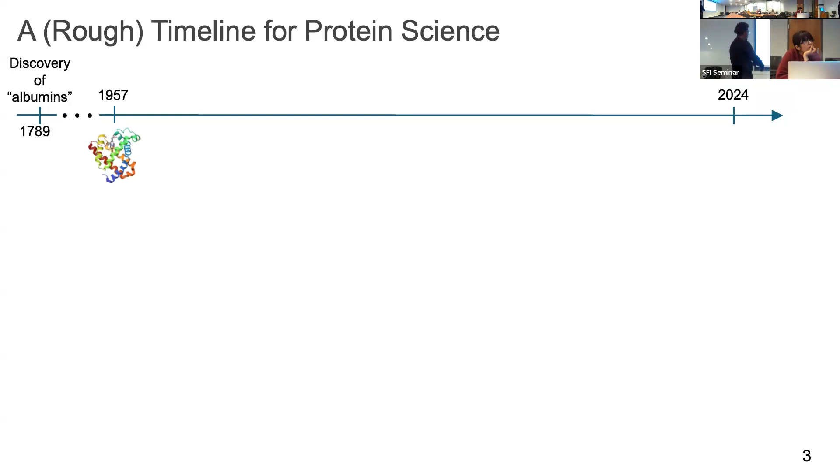Fast forward another 20 years, we get the establishment of the protein data bank, which houses not only protein structures, but also protein interactions and nucleic acid structures. And you can see here that the number of structures looks like it's growing sort of exponentially every year.

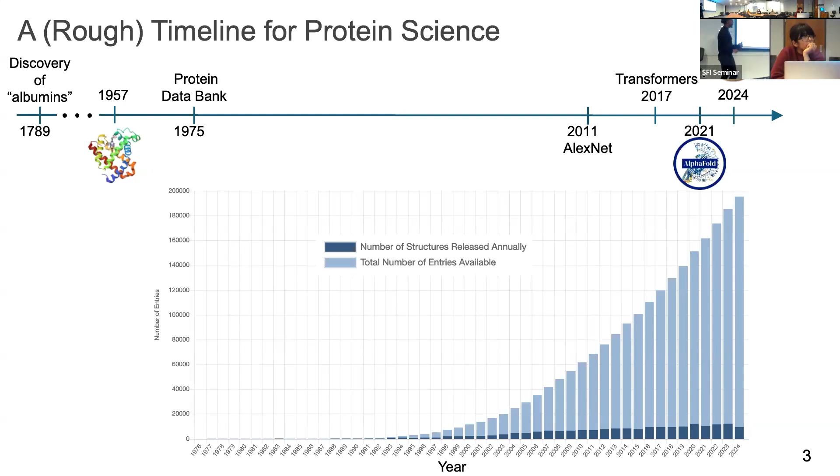And then in 2011, we get the establishment of the modern deep learning era with the publication of the AlexNet paper. 2017, we get the attention mechanism and the transformers architecture. And then in 2021, DeepMind publishes the AlphaFold paper. And then in 2024, the rest is history, they won the Nobel Prize. So what I want you to take away from this is that AlphaFold was trained on nearly 50 years of clean, well-curated crystal structure data.

And so me being a former biologist, the question that I ask is, what's next? So the way I think about what's next is to think about biology in sort of two different paradigms. So here I'm going to use an engine and engine parts. Sorry.

So AlphaFold is the foundation model, if you will, trained by DeepMind that predicts protein structures. So basically what they did was they took this protein databank, they trained on about 200,000 protein structures, and then they were able to predict structures for virtually every known protein.

Not necessarily. I think if you were a super duper AI nerd, you would know. So I'm not assuming that you are, but maybe some of us in this room.

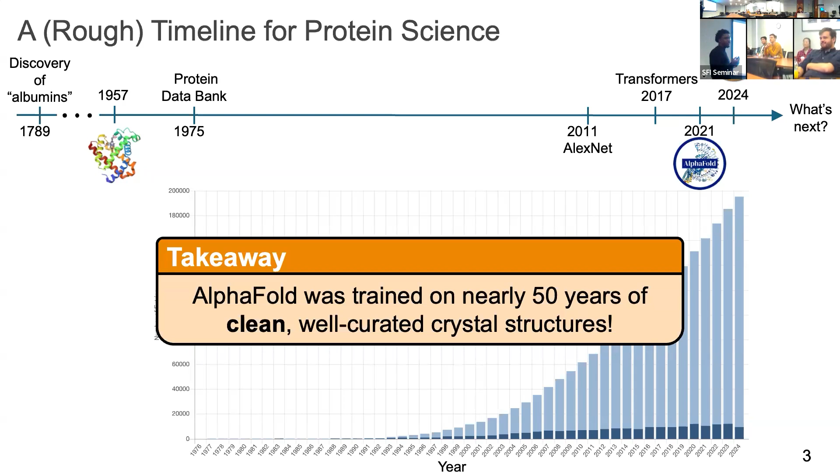Okay, so there's two ways that I think about biology, and I'll use this car engine analogy where the engine is the cell, and the proteins are the parts. And so historically what's been done is that we've looked at these parts in great detail using the tools from biochemistry and structural biology. And we try to infer how these engines or cells work.

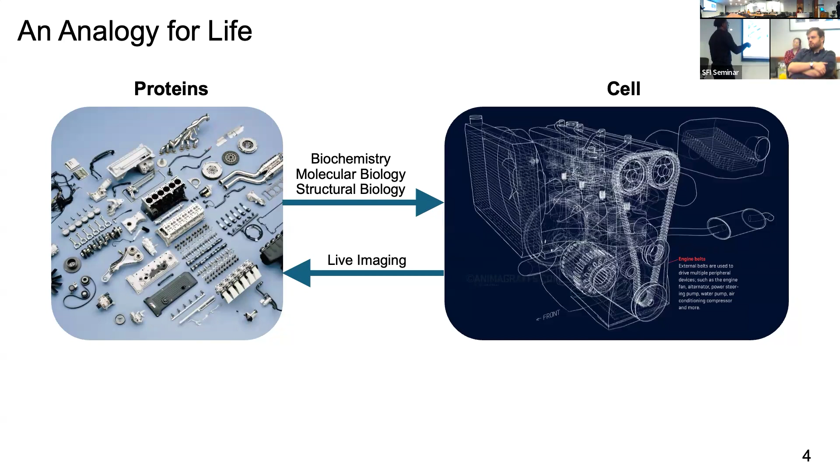This is really difficult. And I think that there's another paradigm which might be more informative, and that's studying the engine directly and trying to understand how these parts or proteins work together to do things inside of live cells. And so this is what I have a lot of experience doing. So in my former PhD, I was studying how cells generate forces in developing embryos. So here's an example here.

You can see these accumulations that are forming, and that's the surface of the cell contracting. So this is a really important process. It happens all over the place. It happens when the cell crawls, or when the cell divides, or when the tissue bends during development. And what I'm showing are a bunch of proteins. These are the kinds of things that AlphaFold can predict the structures of that are involved in this process.

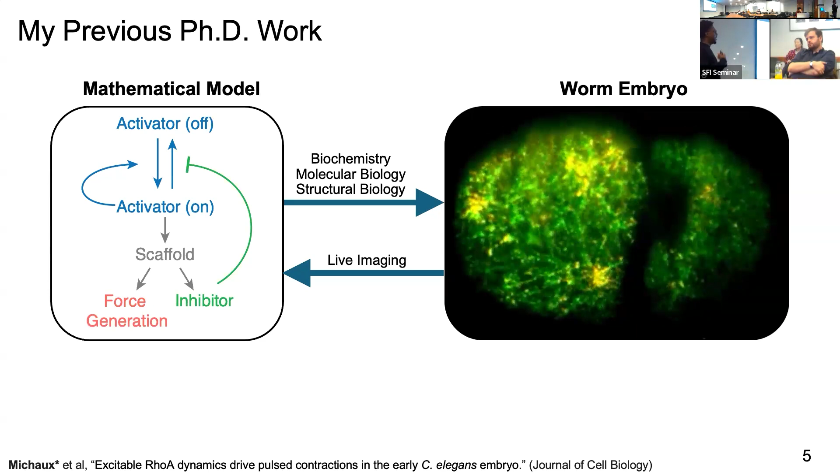So what I did was I made quantitative measurements of these things inside of these cells, and I was able to back out a mathematical model of how this works. And so what I learned in the process was really that the whole is greater than the sum of its parts. And then, with the recent Nobel Prize being awarded to AlphaFold, I started to wonder, why hasn't cell biology had its AlphaFold moment?

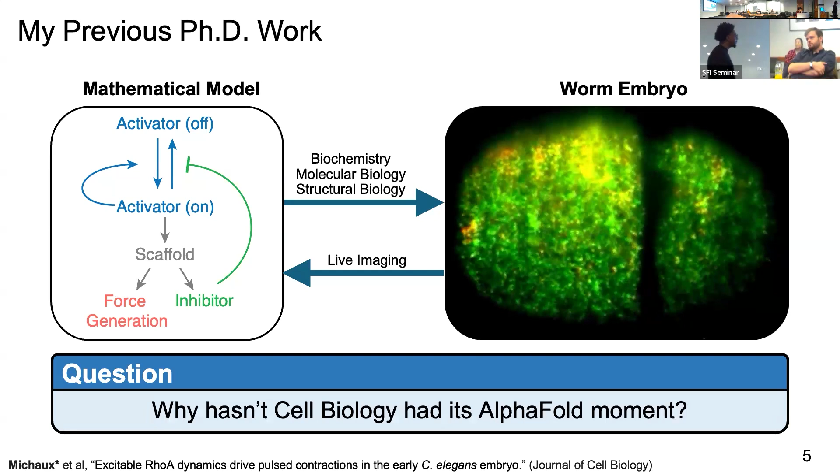And I think the answer is because doing biology is actually very difficult. So it can be difficult to design experiments to study really complex systems, like this embryo that's zippering its neural tube. It's difficult to handle solutions. So putting protein or RNA in solution is very difficult because they tend to denature. It's not obvious how to scale up a lot of experiments.

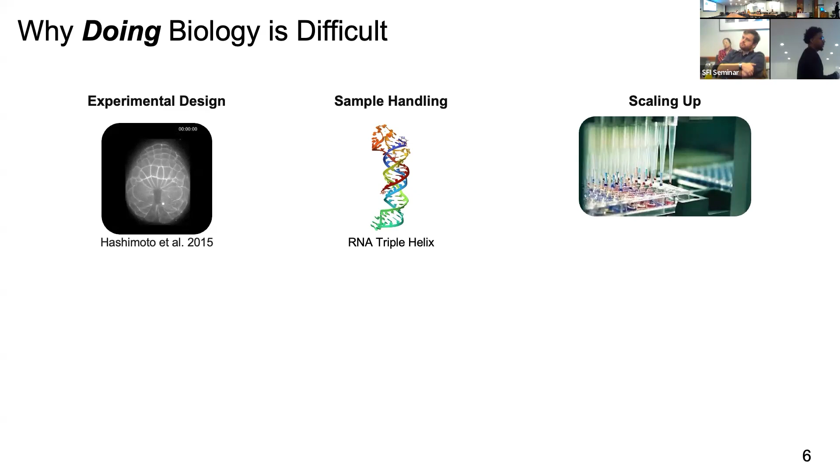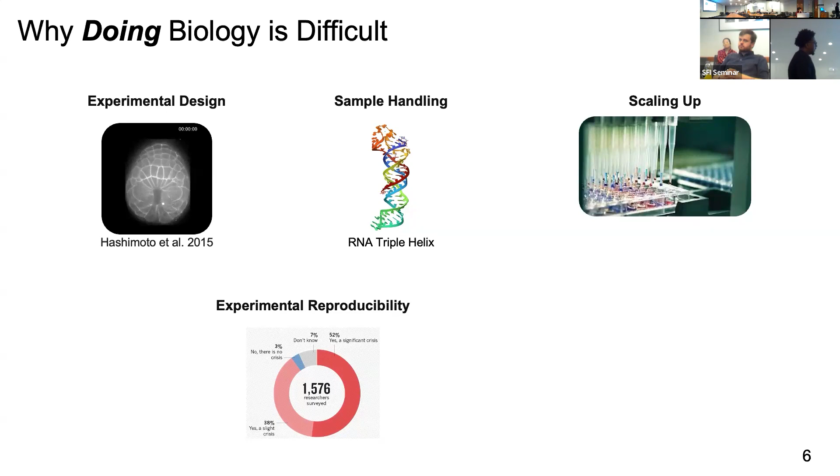So the person who collected this is an exceptional experimentalist, and I'm pretty sure he's the only person in the world who can do this. So how do you scale the collection of this kind of data when there's only one world expert? On top of that, it can be difficult to reproduce experiments, both within a research lab and across research groups. And if that isn't bad enough, your experiments might kill you.

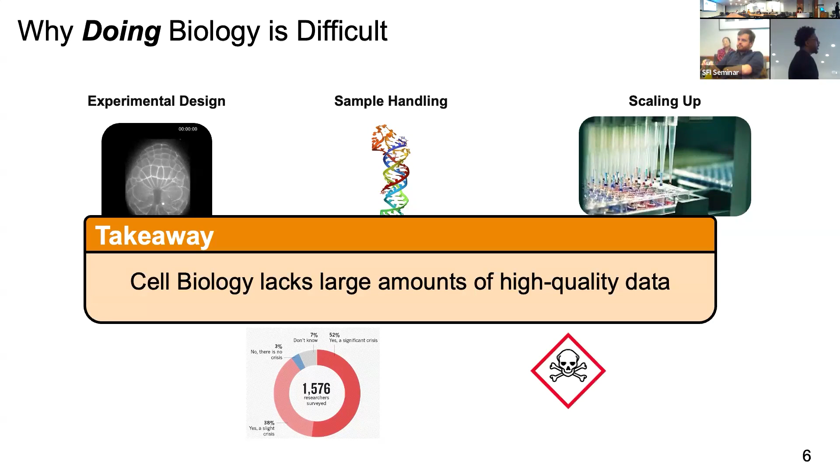And so the takeaway is that cell biology, and other fields in biology, lack large amounts of high quality data to train these large AI models. And so I think the solution to that is to build robot scientists. So this isn't exactly a new idea, because the pharmaceutical industry has put robots in research labs for a very long time, but they tended to be more of the automation style robots, which I'm showing on the left.

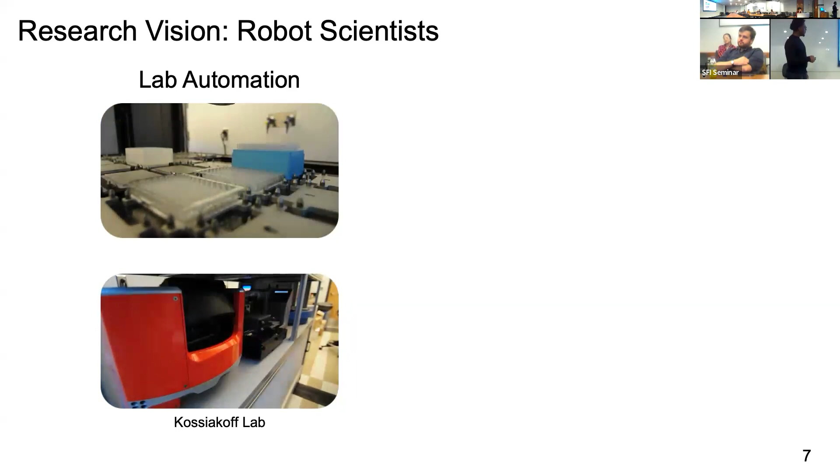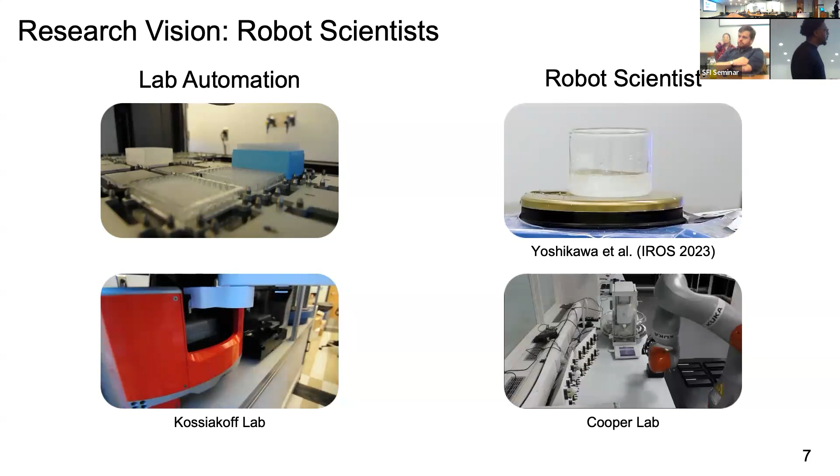So at the top, there's a liquid handling robot that's just moving liquids around, and then a more or less pick and place robot that just integrates equipment by placing plates and things in different machines. But I think that these kinds of robots need to be enhanced with more general autonomous robot scientists. And so what these robots are doing are things that are more similar to what a dexterous, expert human scientist would do in a research lab.

Sure. Source of energy. I mean, movement doesn't happen out of the sky. It has to have an energy. So you're asking for an example like this. Yeah. So I can answer the question, where does energy come from? Absolutely.

So the way this works is that you have molecules like this, which is myosin. So you might be familiar with the myosin that's in your muscles. It turns out that that molecule is also inside nearly every other cell. And it uses the hydrolysis of ATP, which is an energy source, to squeeze things and shift them around. So this is a cell. So it has its own metabolic processes that are producing energy.

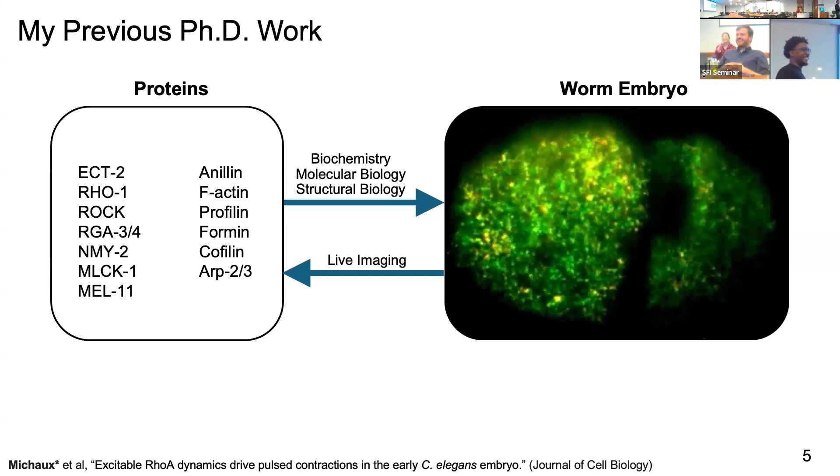It is fascinating. And that's why I spent X amount of years studying it. We don't have to talk about how long it was. Okay. So

The question I've been asking myself lately is, what are the requirements for a robot scientist? And I think some of the requirements are pretty obvious. First, the robot needs to perceive its environment. Research labs tend to be semi-structured. They're dynamic with people and instruments moving around, and they're also full of transparent objects that can be difficult to detect. Robots also need to be able to learn behaviors, especially as an experimental workflow begins to change, right? We don't just continue to do the same experiments over and over.

And this can be difficult because if you're teaching a robot directly on real hardware, it can be expensive to collect real world data. And if you do all of this in sim, crossing the sim-to-real gap is still non-trivial. And then lastly, the robot has to actually go out and do real work in the real world. So that means that everything the robot does should be in real time. The robot should be able to reason over contact as it's grasping and manipulating different objects. And then lastly, and maybe more importantly, the robot should be safe.

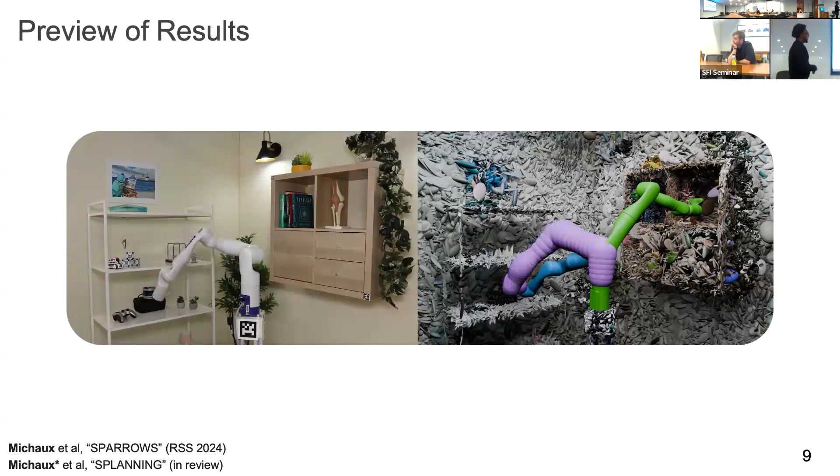And so the question I've been asking myself for the past year is, what are the correct representations for addressing these challenges for enabling robot autonomy? And so here's a preview of some of the results that I'm going to talk to you about today. Like I mentioned at the beginning, I'll talk to you about two different projects. The first project is how we build a safety set around the robot. And then in the second project, I'll describe how we integrate that safety set with radiance fields so that we can plan directly from visual input.

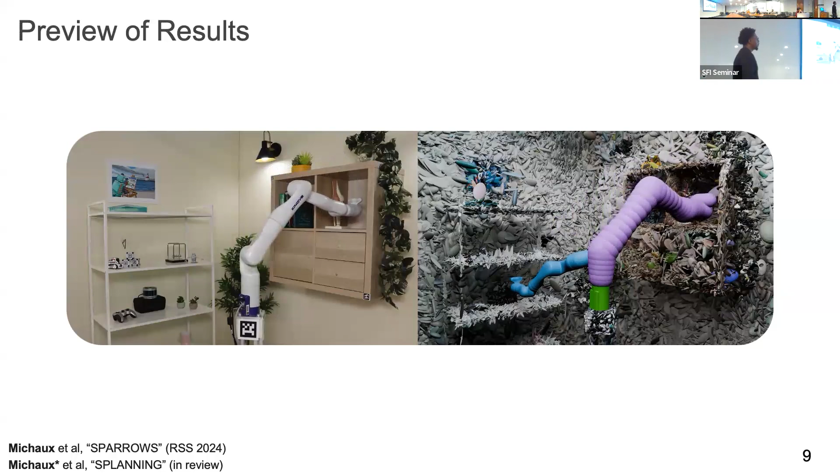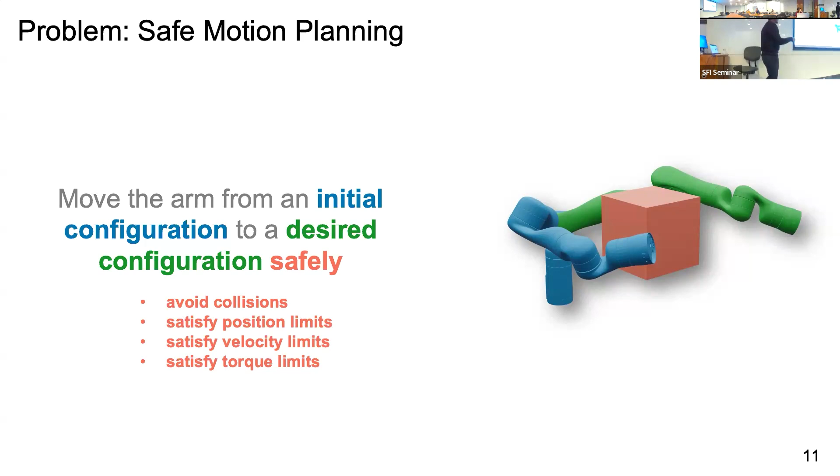So I just sort of mentioned this, so I'll just go past. All right, so here's the safe motion planning problem that I'm trying to solve. So I would like to move the arm from some initial configuration shown in blue to the desired configuration shown in green, and I'd like to be able to move the arm safely. And here, my definition of safety means that the robot should satisfy its actuation limits. So this means that the robot should satisfy its position, velocity, and torque limits.

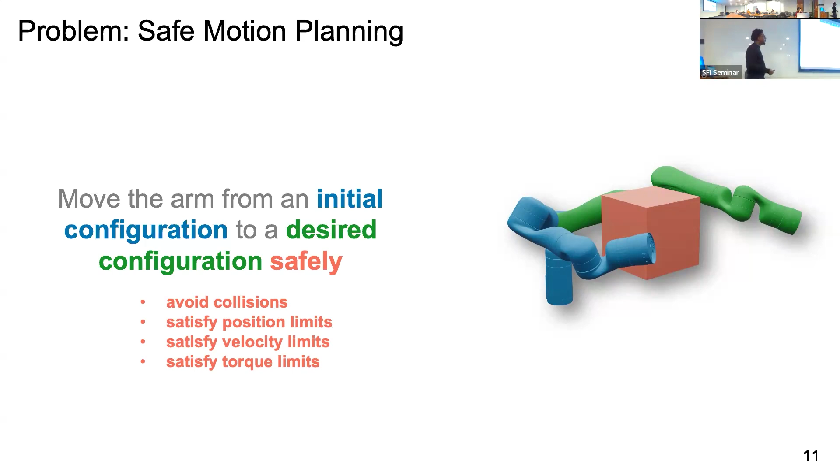So what this ensures is that any trajectory that the robot will follow is actually realizable in the physical system. And then lastly, the robot should avoid collisions with obstacles in the environment.

And the way that I typically approach this is by applying a hierarchical planning framework, where at the highest level, there's a high-level path planner that generates discrete waypoints between the start and the goal. At the middle layer, there's a trajectory planner that specifies the positions, the velocities, and the accelerations as the robot's moving between waypoints. And then at the lowest level, there's a tracking controller that ensures that the robot can actually track the trajectories that are generated by the trajectory planner.

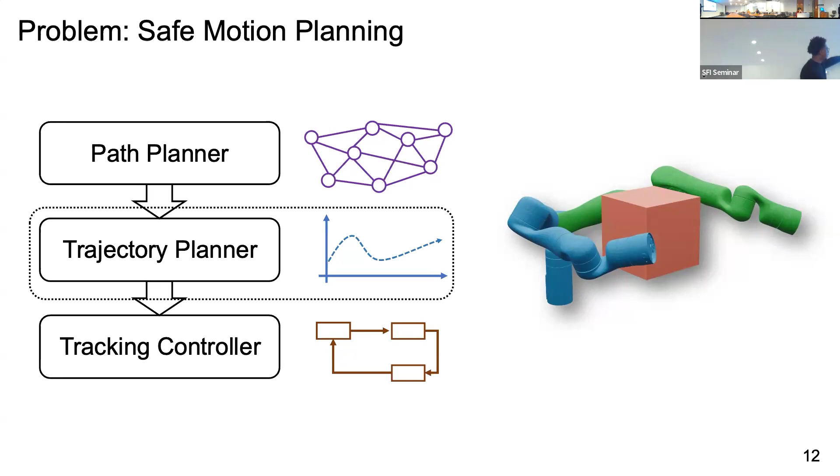And so all of the safety constraints that I'll talk about today are enforced in the trajectory planner. And so I'll approach the trajectory planning problem using a receding horizon framework. Here I'll assume that the robot has access to a high-level planner that can generate discrete waypoints between the start and the goal, but I won't assume that these waypoints are collision-free. So we might actually have a high-level planner that gives us unsafe waypoints, and the trajectory planner has to deal with that.

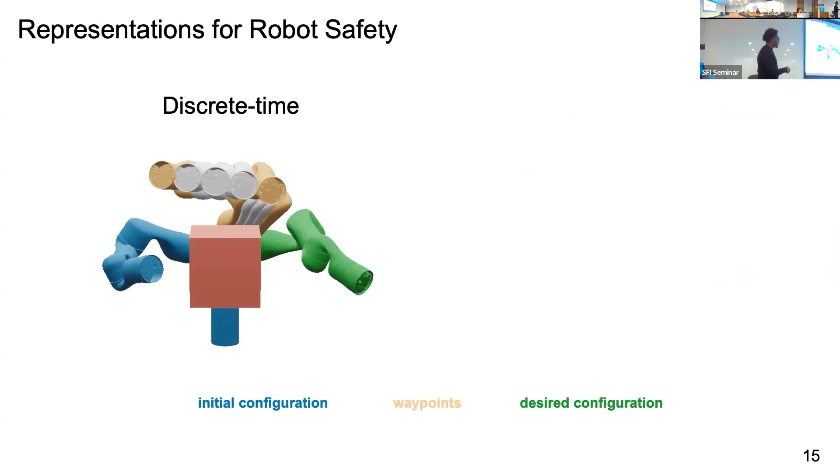And so the question that I want to answer in this section is, how should the robot enforce safety while it's planning trajectories between consecutive waypoints? Okay, so there are a number of ways to think about robot safety, but I usually think of two broad categories. The first category involves discrete time representations. So here, safety is only enforced at particular time points. But unfortunately, this introduces a trade-off. The robot becomes more safe the more finely time is discretized, the more often the robot checks for safety, but this can make it difficult to generate motion plans in real time.

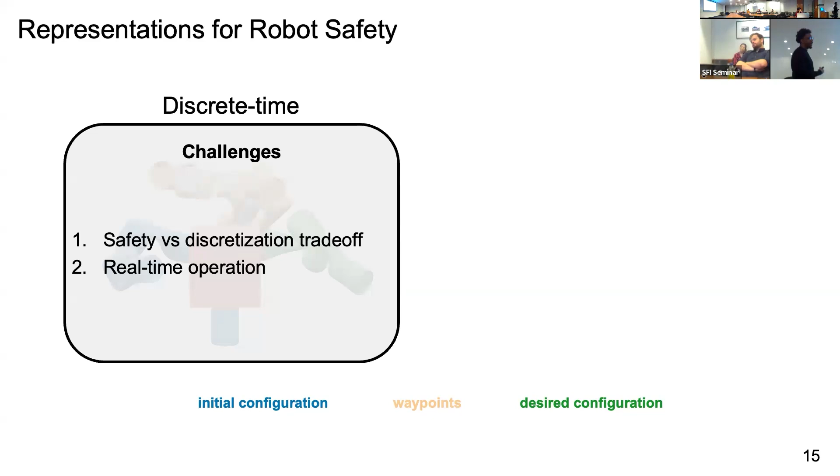The other category includes continuous time safety representations. Broadly speaking, the way these kinds of methods work is you overapproximate all possible states of the robot over some finite time horizon, and you enforce safety using some large overapproximate set. But these methods are also difficult to compute, especially if you don't want them to be overly conservative. And they can be difficult to compute when you have a really high degree of freedom system, right? So imagine generating a representation for an arm versus a full humanoid.

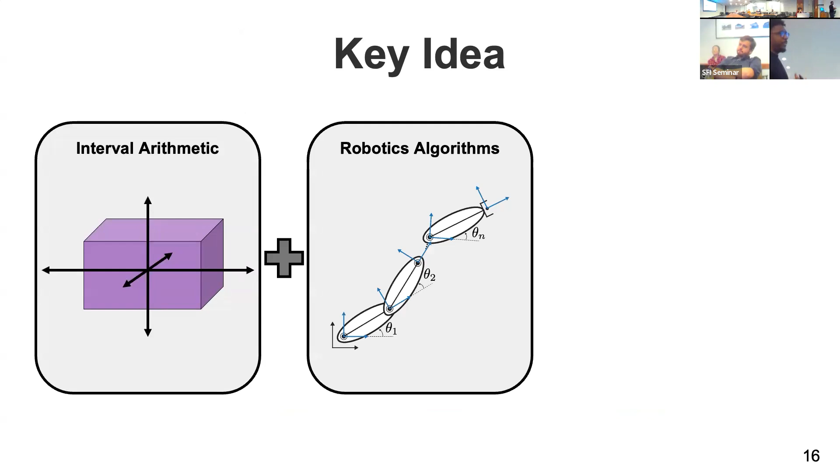And so the key idea behind what I'm going to tell you about in the first part of my talk is that in order to build these reachable sets, we're going to combine interval arithmetic with classical robotics algorithms like forward kinematics or inverse dynamics, and then combine those to compute the reachable set. Okay.

So just to make sure we're all on the same page, I'll give a more mathematical definition of what a reachable set is. If you consider a dynamic system, x dot equals some dynamics f, and you consider an initial set where your system can start, X_i, then the forward reachable set is the set of all states that can be reached from this initial set under the dynamics over some finite time horizon. Okay.

And we have a few assumptions before we get into building a reachable set for this arm. Firstly, I'm only generating reachable sets for serial 7-degree of freedom manipulators. I'll assume that each joint is revolute. This isn't a very restrictive assumption; we can relax it, but in this talk every joint is revolute. I'll assume that the volume occupied by each joint can be overapproximated by a sphere. So if my arm is a robot, I can put a sphere that'll encompass the volume occupied by my elbow.

And then lastly, each link is overapproximated by a tapered capsule formed by 2 consecutive spheres. And actually one more thing. For now, we're going to assume that all of the obstacles are boxes. And just to be clear, I'll assume that I know where all of the obstacles are, how big they are, and how many there are in each environment.

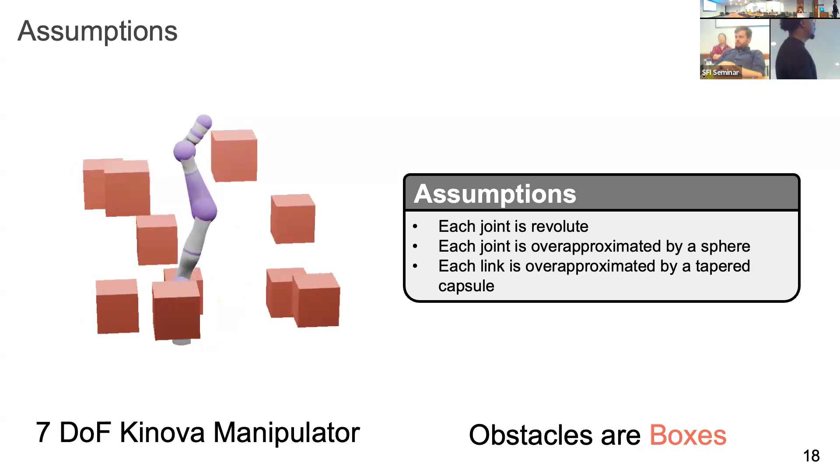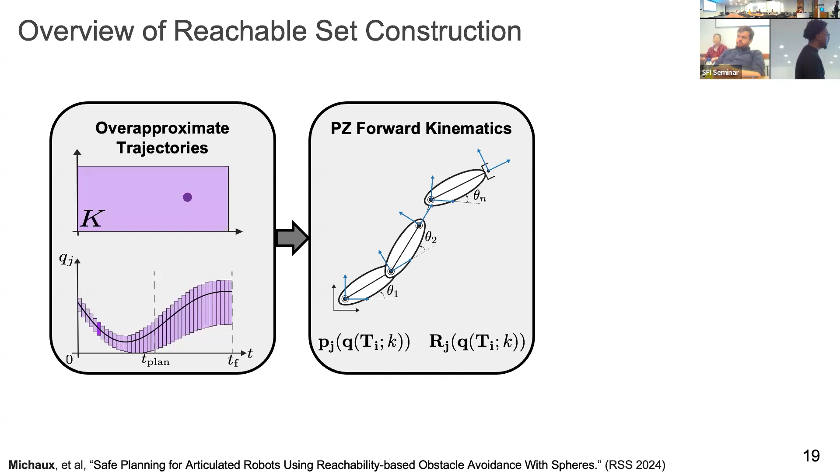We don't have a restriction on overlap. Okay. So here's a very brief overview of how I'm going to construct a reachable set. I'll start by over-approximating the trajectories that the robot can follow. And then I'll feed these trajectories to a set-based formulation of the forward kinematics algorithm. And then from there, I'll walk through how we build the spherical over-approximation of the robot's reachable set.

First question. Absolutely. I'm confused by why you need a reachable set that's not a specific point. If you know where the robot is now, isn't there one place it will be at each point in the future? Let me make sure I understand your question. The set xi in the definition of the reachable set, I guess that's coming from the over-approximation of the trajectories, is that right? I'm not quite sure what your question is. My question is if I know the current state now exactly, which maybe isn't true, then the reachable set ought to have no volume. That's what I would expect.

I understand your question. The challenge is accounting for time. So I might know where the robot is at time ti and ti plus 1, but what happens in between? But don't you know the dynamics of the robot, or you're assuming you don't know the dynamics? I think even if you do know the dynamics of the robot, how would you compute it exactly, is my question. Okay, maybe I'm realizing my mistake here is that the volume is coming from the volume of the robot too. Yeah. I see, okay.

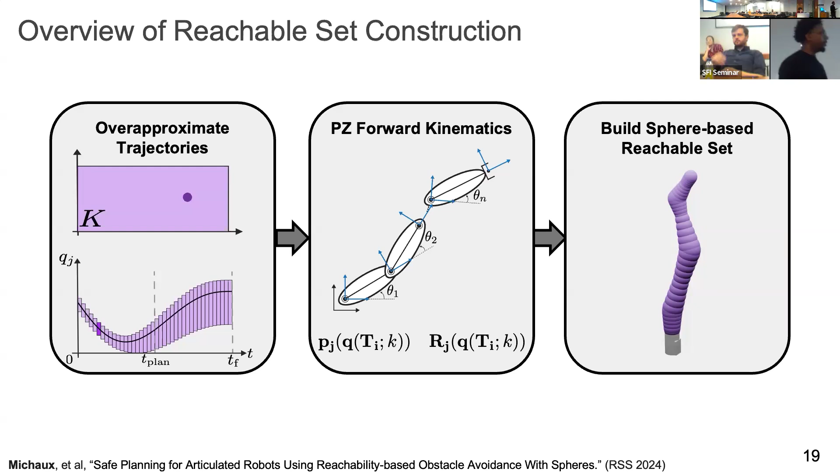CAD software has done this historically, computing swept volumes of objects. And at best, they have really good approximations. And sometimes it may take a long time to compute. And so what I'm describing is something that can be computed fast enough to do real-time planning. Okay, thank you.

So in order to build these reachable sets, for both the joints and the robot, we will need this particular set type called a polynomial zonotope. It's just a set, but it's characterized by a vector called the center and vectors called the generators. And each of these generators is multiplied by indeterminate coefficients, which are just numbers that live in the interval -1 to 1. We can do a lot of operations on polynomial zonotopes. We can slice them, which is just a fancy way of saying we can plug in actual values for some of these indeterminates.

We can overapproximate polynomial zonotopes by intervals, meaning we can put a bounding box around them. If we have two polynomial zonotopes, we can add them together, computing their Minkowski sum. And if we have a matrix and a polynomial zonotope, we can compute their product. And lastly, we can also do set-valued function evaluation. This means that if we have a function f that's analytic, like sine or cosine that has an infinite Taylor expansion, we can evaluate what that function will look like if we pass in a polynomial, and overapproximate this set-valued function evaluation with another polynomial set.

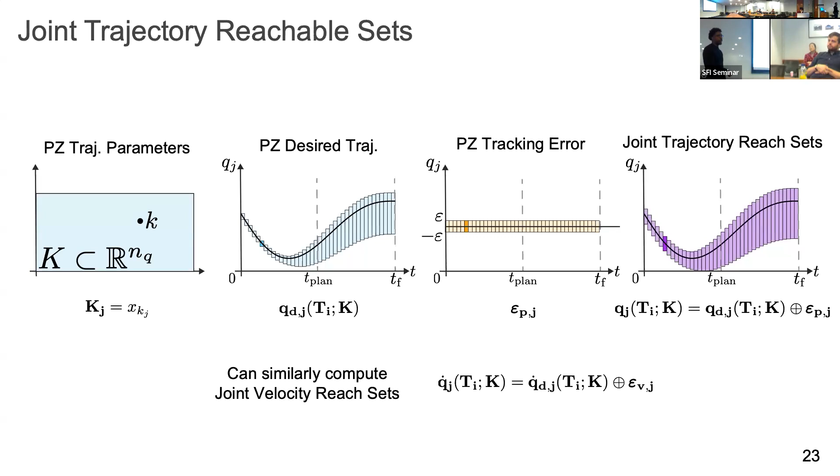And then just note, we can also build a similar joint velocity reachable set. So we can also over approximate the velocity of each joint in a similar way. And so the main thing to take away is that for each trajectory that we can choose, our actual desired trajectory lives within this over approximation. And so this guarantees that when the robot follows this trajectory, it will remain safe.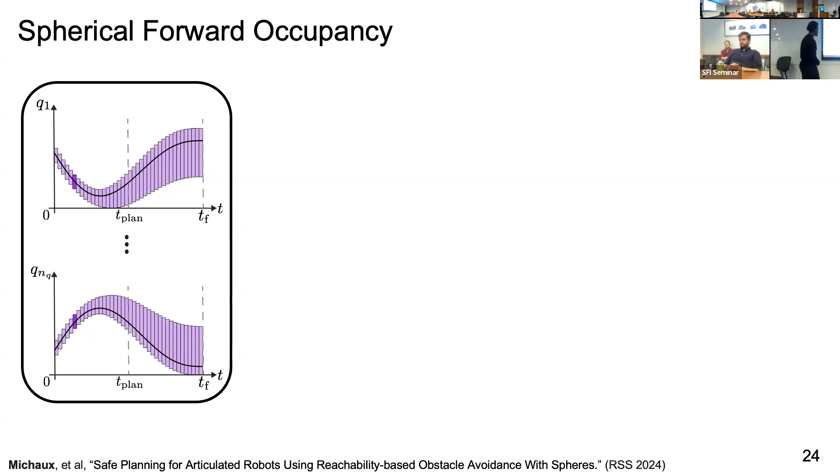Okay. So now that we have our over approximated trajectories, we can then use them to build a spherical forward occupancy, which is just an over approximation of the robot's reachable set, and it's composed entirely of spheres. So I'll try to walk through this slowly, but please, if you have questions, just interrupt me. Okay. So for each time step, we select out the interval representing the joint position. We pass this to a forward kinematics algorithm. So it's a PZ forward kinematics algorithm, meaning that it does the same kinds of operations that the forward kinematics algorithm does, but now it's using interval arithmetic or polynomial zonotope operations.

The output of that is an over approximation of the position of each joint frame, and an over approximation of the orientation of each joint frame. And so that's what I'm showing here. So these polynomials over approximate the position of these two joints. The next thing I do is over approximate these joint position PZs with spheres. So now spheres are over approximating the position of each of the joint frames. And if you recall earlier, the assumption is the volume occupied by each joint is a sphere.

So I've added these joint position spheres to the joint volume spheres to get what I'm calling the spherical joint occupancy. So this is an over approximation of the positions of the volume occupied by a joint over a particular time interval. Okay. And then from there, we add in another collection of spheres, and now we've over approximated the link volume. So I won't really go into the math, but we've overlapped these spheres in a way to ensure that it's actually over approximative of the robot's behavior. There's discretely many, but you've done it in a clever way that you don't lose anything. Exactly. Yep. Any questions?

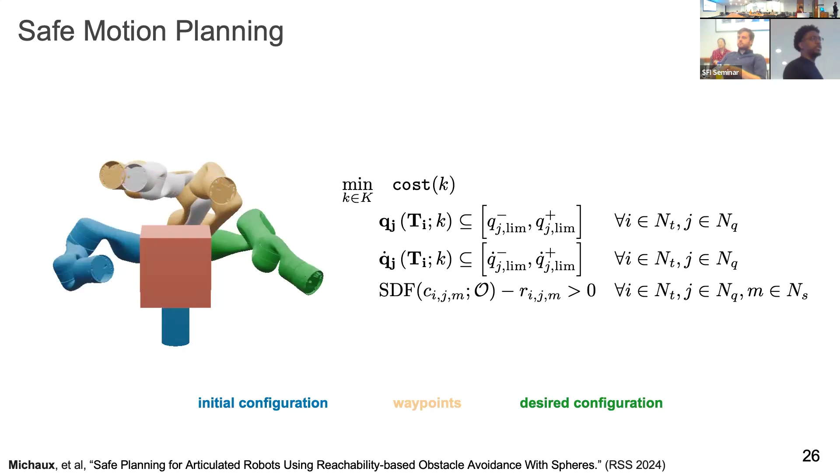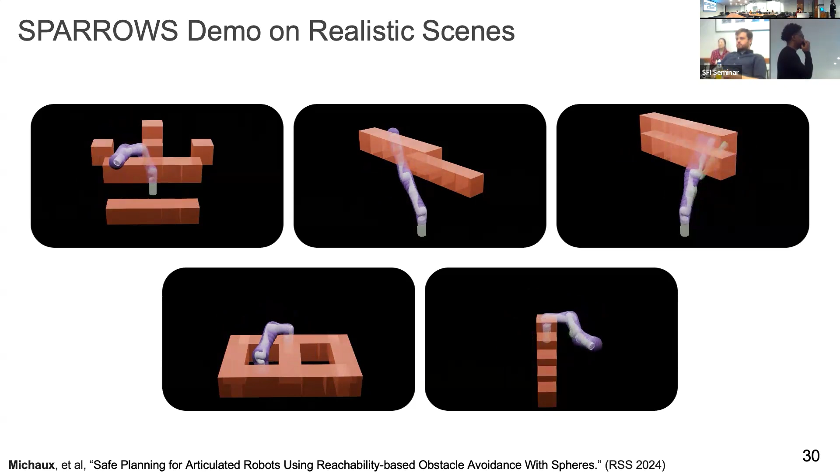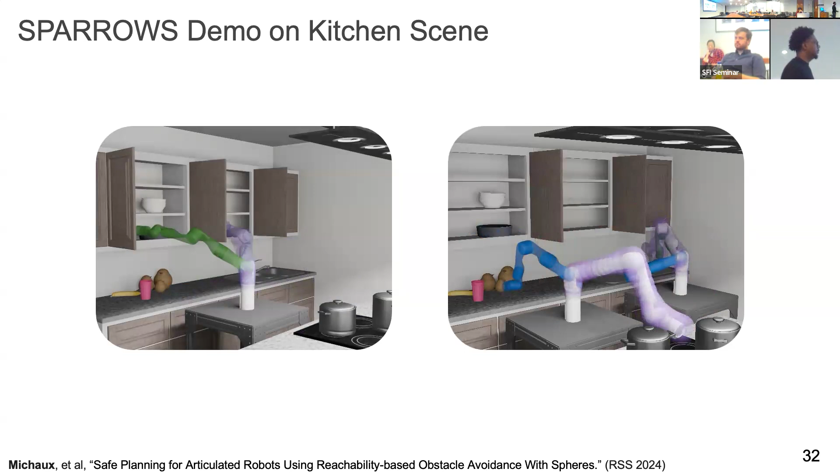Does the SDF account for the other arms, in addition to the obstacles? No. So we've erected a small invisible barrier between the robots. I probably won't talk about it today, but I'm currently working on a novel self-intersection constraint that'll actually allow us to do general bimanual motion planning. Are there any questions about this?

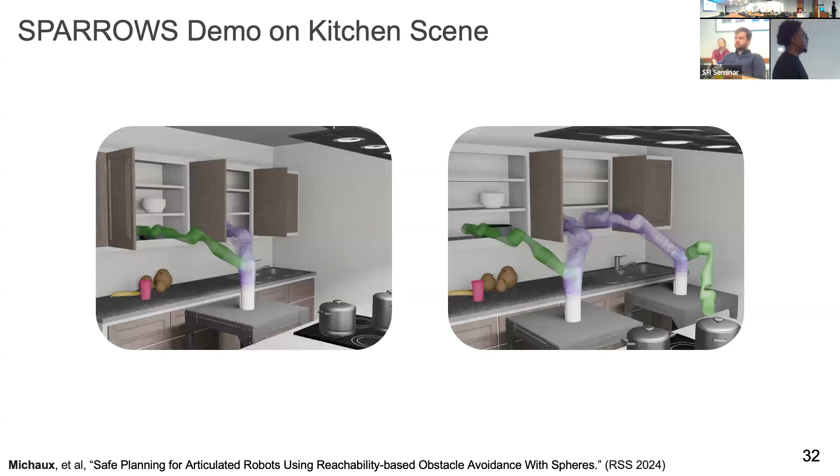Okay, so everything I showed you was in sim for SPARROWS, but I'm currently working with a really talented master's student named Yongseok, and one of the things he decided to do was, instead of building these reachable sets directly from polynomial zonotope arithmetic, he decided to learn those reachable sets and then apply conformal prediction for uncertainty. So he built a data set characterized by the initial position, the initial velocity, and the trajectory parameter. The targets in this data set are the centers and radii for an individual trajectory and the corresponding reachable set.

He then trained a center network and a radius network. And this is what the output looks like. I'm showing ground truth here on the left, and on the right is the prediction buffered by a measure of uncertainty quantification.

And so Yongseok was able to prove this really nice theorem that says if the signed distance between learned reachable sets at time step i and obstacles is greater than 0, then the probability that the true reachable set of the robot is collision free is lower bounded by this term, with this user-specified parameter. So essentially we have this empirical notion of uncertainty, and if he satisfies that, the performance of CROWS, his method, closely matches that of SPARROWS. For 10 obstacles they're identical, and for 20 to 40, CROWS gets slightly fewer successes.

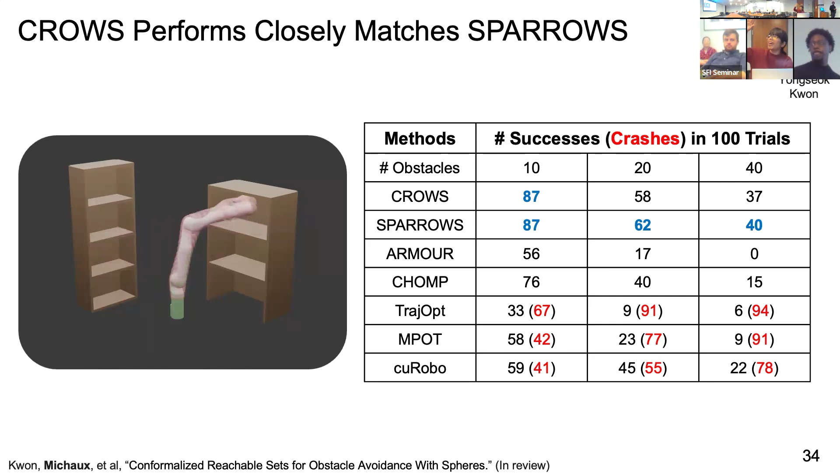I'm gonna ask you all to hold your questions because we're at 4 p.m. now. You can have like 5 minutes maybe to finish your talk. Okay. All right, so this will be very fast.

Gaussian splatting is really interesting. And the goal in this part of the talk is to use Gaussian splats to do trajectory planning. Okay. And so what I'm gonna try to tell you is how to enforce safety. The problem is the same. We still want to move the arm from some initial configuration to a desired configuration, but we're going to relax our strict collision avoidance constraint to some notion of risk-aware collision avoidance. Okay.

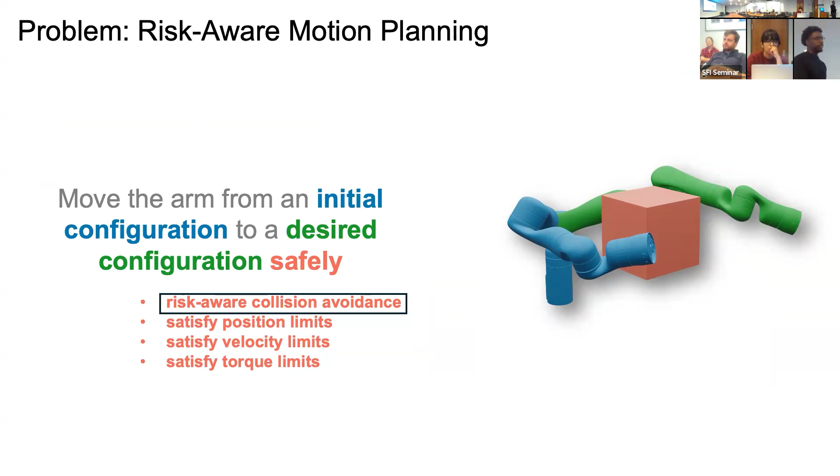The assumptions are mostly the same, but instead of modeling the obstacles as boxes, we're going to model the scene as a Gaussian splat. And the key idea is that I will derive a bound on the probability of collision between a sphere and a normalized Gaussian splatting model. And the derivation of this bound comes directly from the volume rendering equations. Okay.

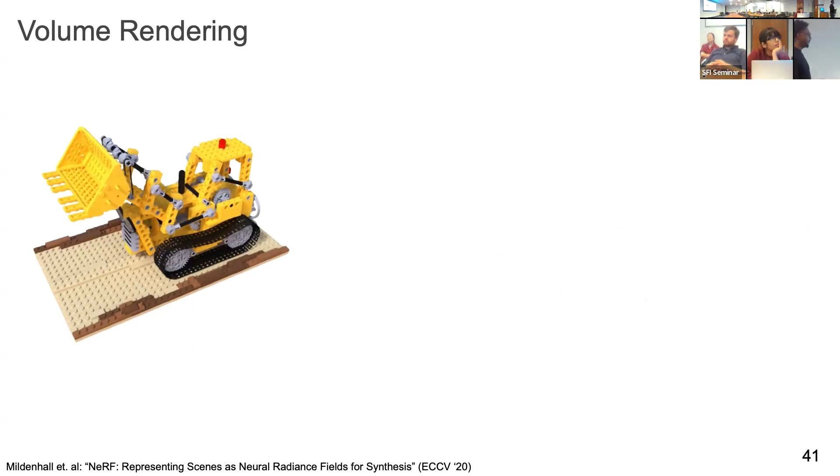You can render volumes by shooting a bunch of rays through a scene and then estimating rendering density and the color at each point, right? And then once you have the rendering density, you can compute this term called the transmittance, which is essentially the probability that a ray traveling through the scene along some interval can travel along the interval without collision. Okay. And then I'm not going to talk about color, but here's how you compute color. So you can take the rendering density, transmittance, the color at a point, and you can get an expected color along the ray. Okay, I have to move quickly.

So here's a really, really quick overview of how volume rendering works with splats. We estimate our rendering density using a collection of Gaussian basis functions. We can then transform those Gaussians into camera coordinates, and then we can transform them to camera ray coordinates. And then if we integrate the Gaussians along the depth, we can splat them on the image plane. So the splatting and then recombining is what gives you images. And then on this side, there are a bunch of loss terms that you can use to backpropagate the error and then propagate the Gaussians in world space. Okay, so here we only care about Gaussians in world coordinates.

Okay, so here's what the probability of collision looks like. I'll just start with a single sphere and the scene represented by a single Gaussian. I'll define a random variable representing the direction of a ray that is randomly cast from the center of the sphere.

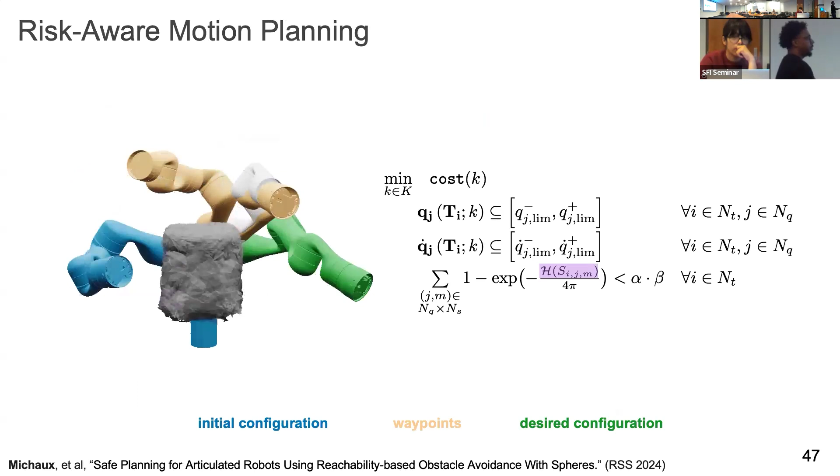Here, eta prime sub n is just the normalization constant of the Gaussian. And then we can evaluate this analytically using the error function. So the nice thing is that this is analytical, and it's differentiable, so we can plug it into our optimization problem. Okay, so this is what the bound of this volume integral would look like if we integrated over multiple Gaussians. The form is basically the same, it just turns into a sum. We can rearrange the terms a little bit and then plug this in as a constraint in our optimization problem. Here's what this looks like in simulation.

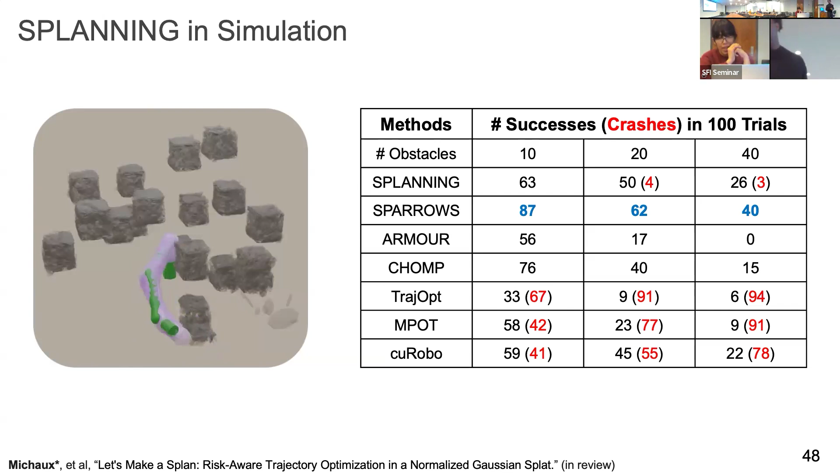You can take a few more minutes, but okay. I won't let it go beyond 4:10.

Why do you want to plan in Gaussian splats? What are the advantages of that representation? So up until now, everything I showed you assumed that all the obstacles were cubes, right? And I assumed that I knew the size, the location, the shape, etc. I think in practice, that's pretty restrictive. And many times we want to build a scene representation that doesn't necessarily account for every little obstacle that's in the environment.

That's one. It's really nice having an explicit visual representation like a Gaussian splat compared to something like a NeRF. Because if you were to change the scene, I think it's a little bit easier to think about how you might update the Gaussians if you move things around. What was the third thing I was going to say? I can't remember.

Okay, all right, so that's it. I will leave you with two questions. The first question is, are spheres all you need? And the answer is probably no. But I do think that it's a useful representation because spheres work well with different kinds of visual scene representations like point clouds or signed distance fields. I didn't talk about either of these, but I did show that we can do planning in radiance fields represented by Gaussian splats.